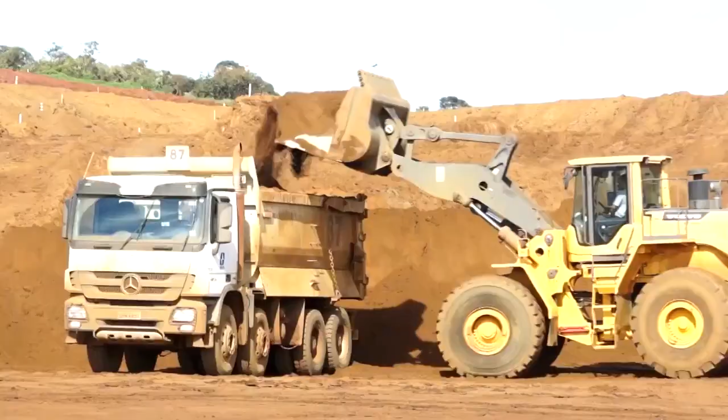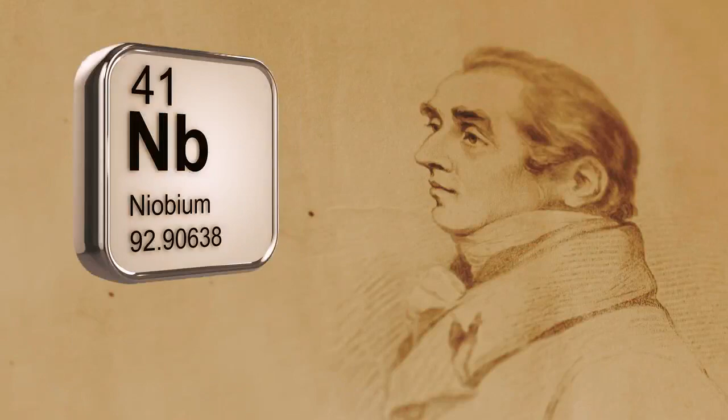The Charles Hatchett Medal, cast in niobium metal, is a prestigious award promoted by the Institute of Materials, Minerals and Mining, IOM3, and is sponsored by Brazilian mining company CBMM, Companhia Brasileira de Metalurgia e Mineração. Charles Hatchett was an eminent fellow of the Royal Society who discovered the element niobium over 200 years ago, and its unique properties have subsequently earned it a special place in the history of steel development, particularly in the last century. In fact, niobium was first added to stainless steels to improve weldability over 80 years ago.

The Charles Hatchett Medal is awarded annually to the authors of the best recently published paper on the science and technology of niobium and its alloys. The winning 2015 multi-authored paper describes an innovative approach to the metallurgical design of ferritic stainless steels, and we will learn more about this later. The research was carried out by a multidisciplinary team from Germany and the Czech Republic.

The winners of the award were presented with their medals during the IOM3's Premier Awards dinner on the 14th of July in Kensington, London. For me, that's really nice and impressive. Especially because now we're in line with a great row of former winners, and this really feels good. Yeah, I'm greatly honored to be one of the winners of this prestigious award, and I'm especially glad to have been part of the team who elaborated the work. And I think this award will provide us increased international visibility to boost our future research efforts on this topic.

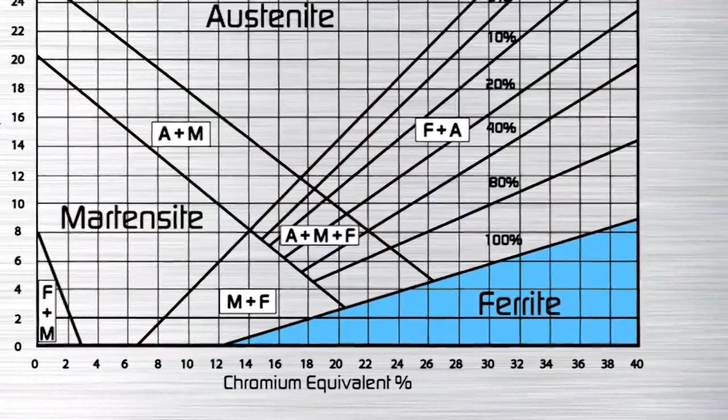Ferritic stainless steels, which contain either no nickel or much lower levels than austenitic stainless steels, are growing in popularity as a result of increasing nickel costs and have already gained a 30% share of the stainless market. The most common variants contain either 12% or 17% chromium, and specific sectors such as automotive are growing at 7% per annum.

The most common variant, which Marcos described as the ferritic workhorse, grade 430, is a 17% chromium alloy containing less than 0.75% nickel. We will see later how a niobium addition can provide ferritic stainless steels with enhanced combinations of strength and toughness, and Marcos also indicated how the use of niobium and molybdenum together could optimize high-temperature properties.

Ferritic stainless steels make sense, as they save substantially on key alloying elements, and thus make a significant contribution to the sustainable use of world resources. Bernd Kuhn of the Forschungszentrum Jülich GmbH Institute for Energy and Climate Research in Germany was then invited to present the 2015 Charles Hatchett award-winning paper on behalf of his co-authors.

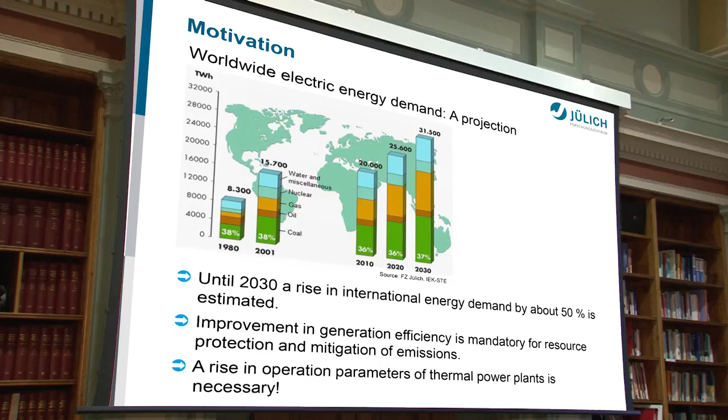By way of background, Bernd explained how world energy demand over the next 15 years is anticipated to rise by 50%, which would place additional efficiency demands on current and future power generation plant. Increasing efficiency can be obtained at higher operating temperatures, which require steels with higher chromium levels to give the necessary steam oxidation resistance. However, without taking additional measures, creep strength could be substantially reduced, negating any potential benefits of attempting to operate at higher temperatures.

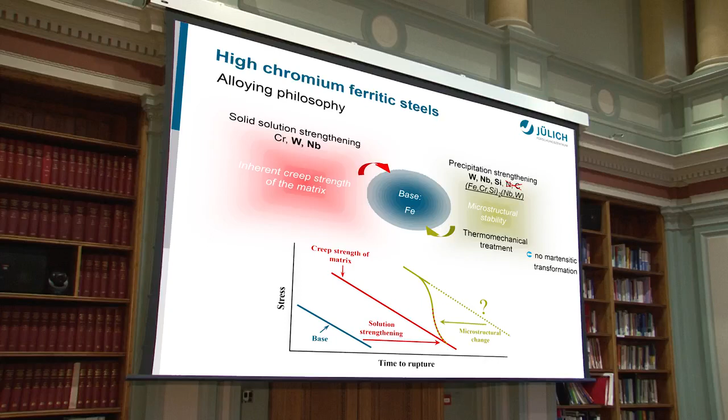Bernd's presentation continued to describe how, by optimizing the balance between tungsten and niobium in ferritic stainless steels with around 17 to 20% chromium, creep strength could be maintained or improved. Niobium enables this by increasing the volume fraction of Laves phase and by refining particle size and thermal stability.

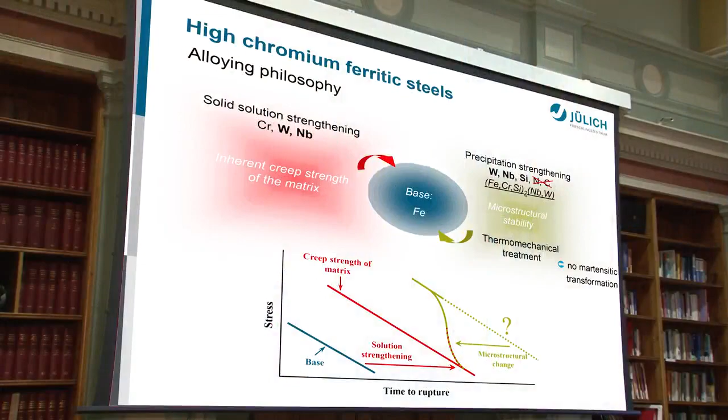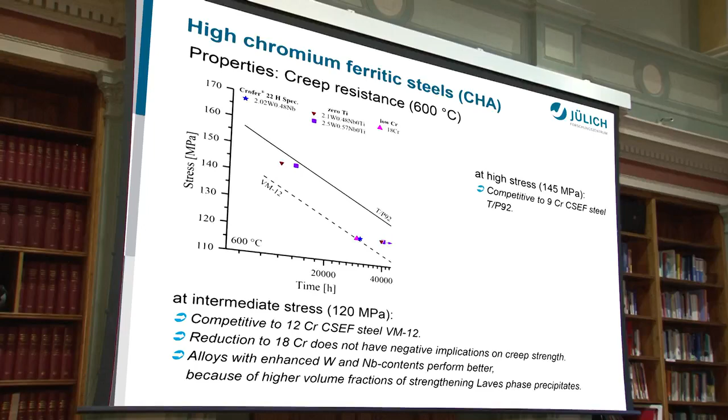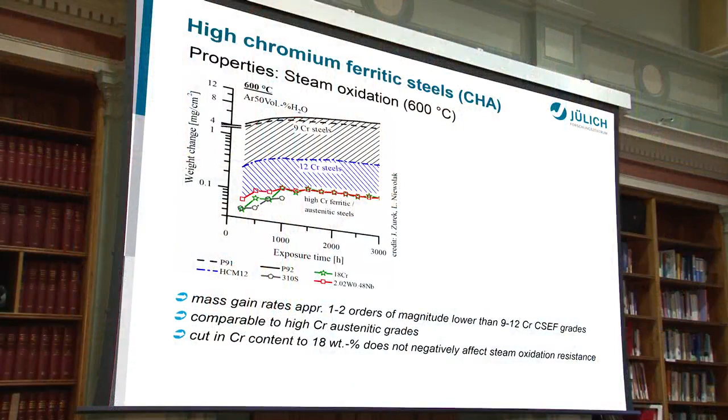By manipulating and optimizing thermal processing, alloy variations which exhibit adequate creep strength at up to 650 degrees centigrade can be achieved. This represents a remarkable breakthrough with this class of ferritic stainless steel. Finally, Bernd outlined an ongoing program for the development of compatible welding electrodes for the advanced variants of the new alloy designs.

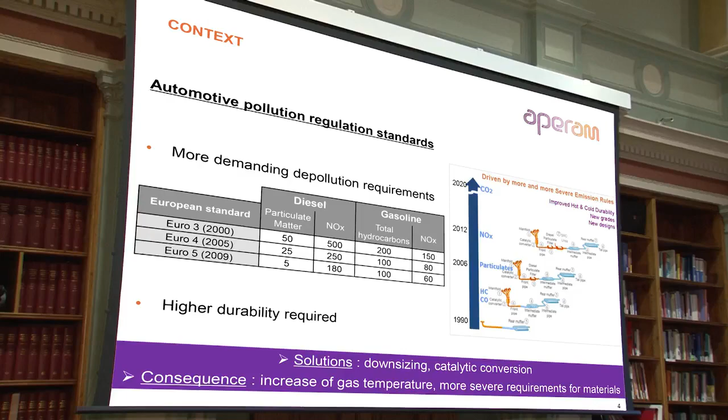Naylor then welcomed Laurent Fèvre of Aperam-Isbergues, France, to the podium to present a paper concerned with the development of a new ferritic stainless steel with improved thermomechanical fatigue resistance for exhaust parts. Laurent explained that increasing focus on pollution control and improvements demanded by new Euro standards were resulting in increased gas temperatures in automotive exhaust components, such as manifolds and turbochargers. Gas temperatures between 1000 and 1050 degrees centigrade are likely to be encountered.

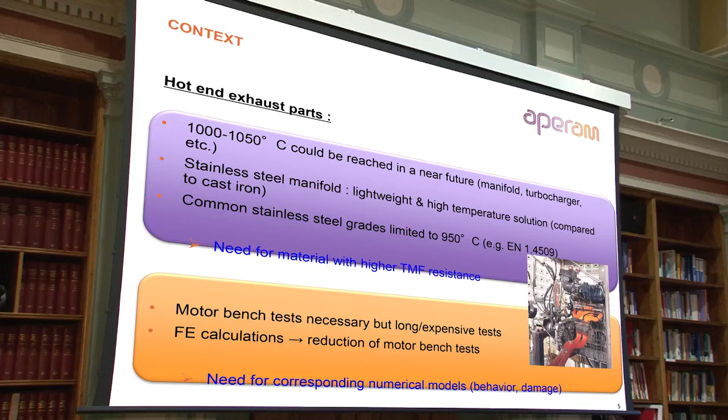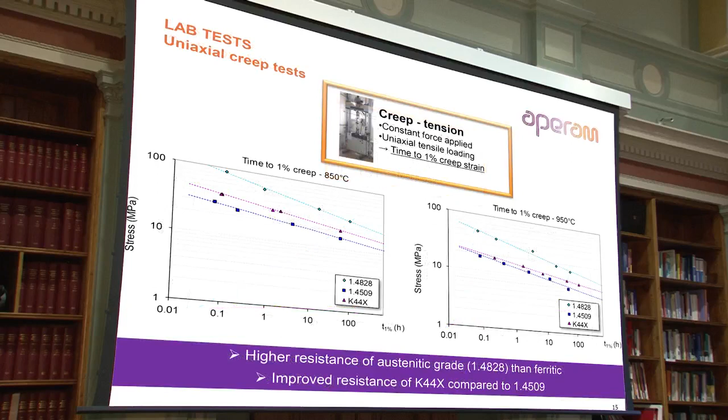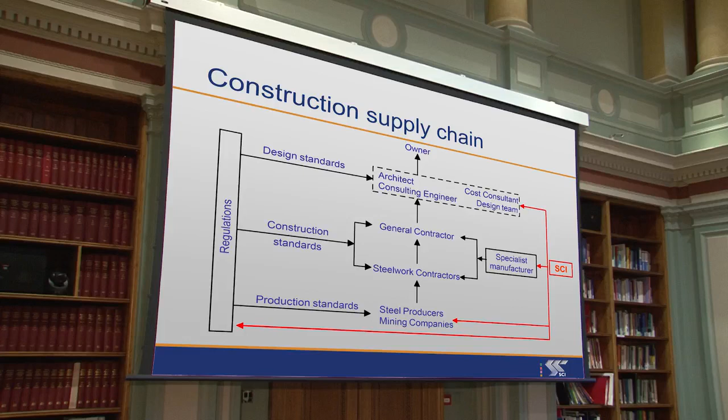Nancy Badu of the Steel Construction Institute, UK, was then invited to present her paper on ferritic stainless steels for construction applications. Introducing her presentation, Nancy explained the way in which the Steel Construction Institute interfaces with the supply chain in the UK. The SCI provides standards information, supporting guidance, fabrication and erection specifications, etc. She indicated that the Institute aims to influence designers and specifiers in favour of steel.

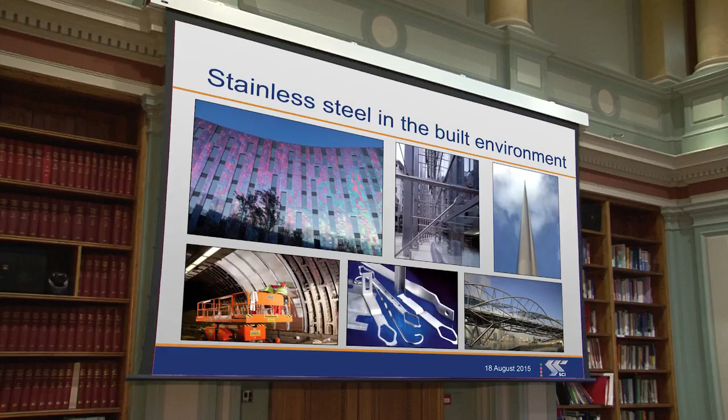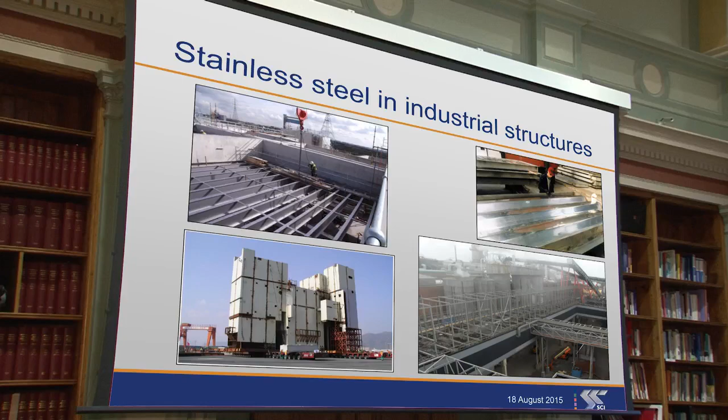Turning her attention to stainless steels, she used examples from the built environment and industrial sectors to illustrate potential benefits for stainless steels when lifetime cost considerations are taken into account. One example cited was of hand railings in a marine environment, where the long-term benefits of stainless provided clear and ongoing maintenance cost benefits after just 15 years of service.

Nancy continued to explore areas where ferritic stainless steels could be used to advantage in place of much more expensive austenitics, and used examples from Australia to validate her ideas. She also explained that in some circumstances, ferritic stainless steel could be a long-term economic competitor for galvanized mild steel.

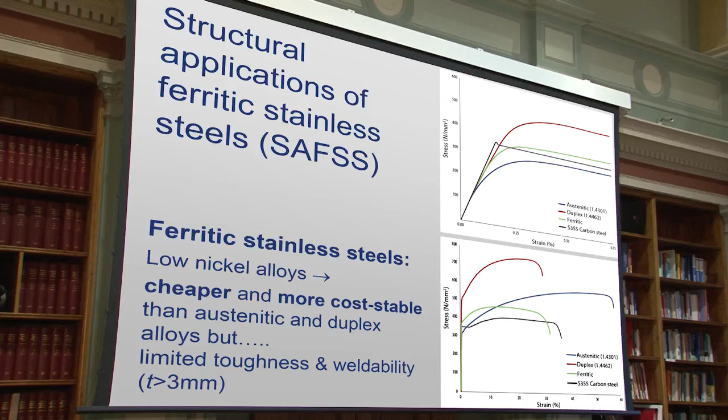Finally, with reference to the stress-strain tensile behavior of ferritic stainless products, she indicated how their higher strength and lower continuous yielding could be used to maximum benefit, including for fire resistance up to at least 600 degrees centigrade.

Nyla then introduced Yang Weihao of the Shanghai Mitsubishi Elevator Company in China. Yang presented an interesting paper on the use of high surface quality niobium-bearing ferritic stainless steels for elevators. Yang introduced his subject in dramatic style, with a view of the 632-metre-high Shanghai Tower, which boasts the fastest elevators in the world. They travel at an amazing 18 metres per second.

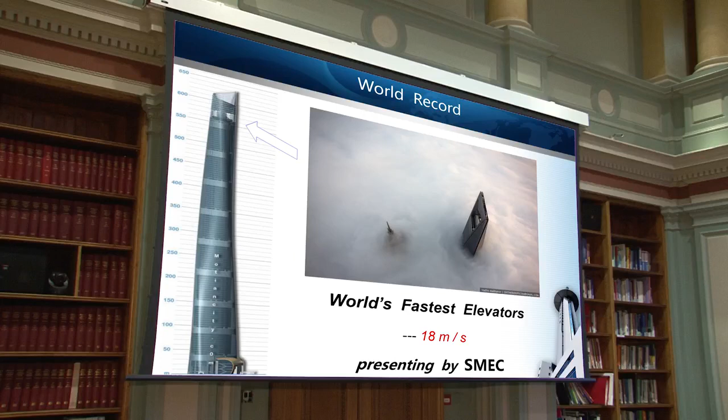The market in China for stainless steel is growing at a remarkable rate, and Yang's company has been number one in the elevator supply chain for 22 consecutive years. Yang described the aesthetic and practical advantages of stainless steel for many different elevator components, and also explained how its ease of formability contributed to its growing popularity.

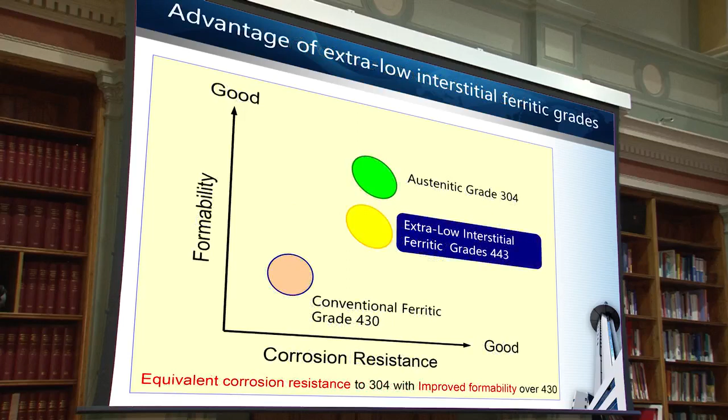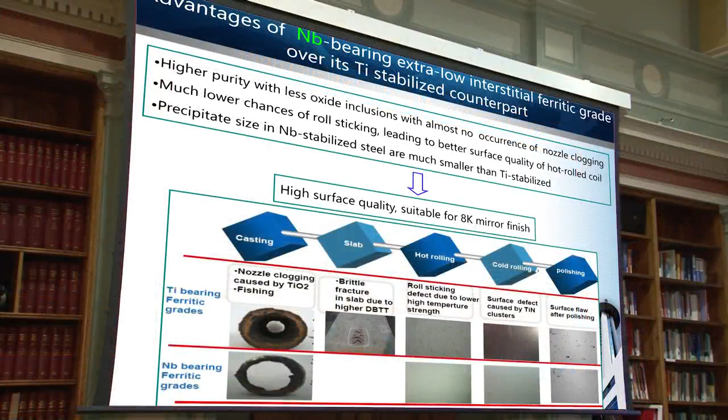However, using additional niobium at the 0.3% level in combination with copper up to 0.4%, a new, finer-grained steel has been developed with significantly enhanced tensile properties. The enhanced steel, grade B443NB, has already been successfully utilized in many different types of lifts and is saving up to $4.2 million per annum through weight saving and other advantages. Research is ongoing to maximize the benefits which can be derived from this latest addition to the ferritic stainless steels family.

The final speaker at the seminar was Andrew Backhouse of Outokumpu Stainless, UK, who presented a paper outlining future developments in stainless steels containing niobium. Andrew opened his presentation by reminding the audience that his company's base in Sheffield was the birthplace of stainless steel through Harry Brearley in 1913. He then went on to describe Outokumpu's world market penetration in the stainless market, indicating that 19% of their market was already accounted for by ferritic variants.

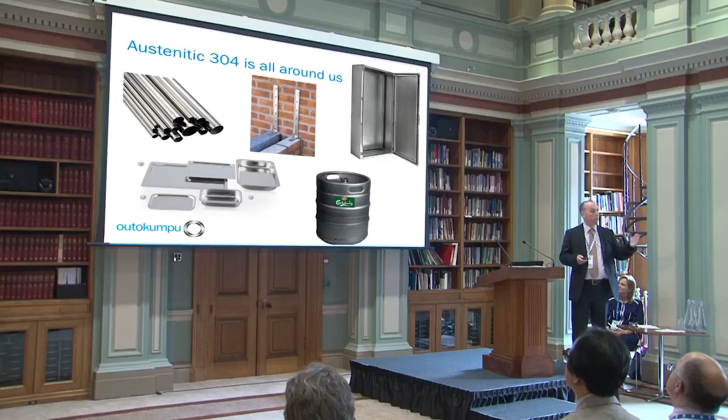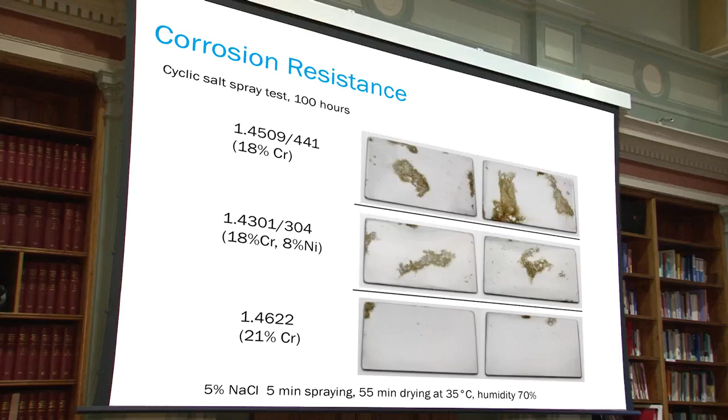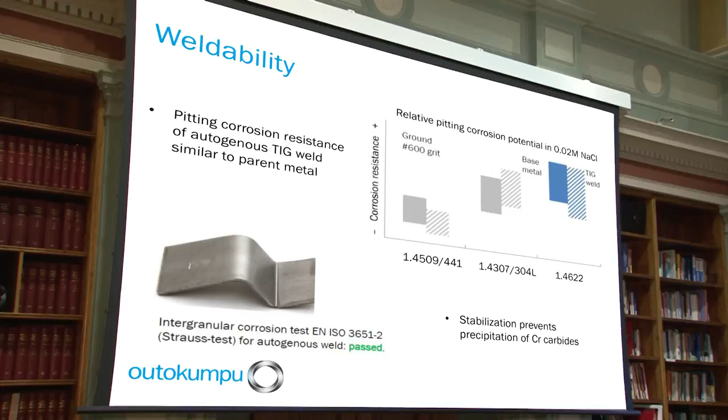Austenitic grade 304 is all around us in everyday applications, but the ferritic 430 grade is an increasingly important competitor in the UK market. Now, with further development, new improved grades of ferritic stainless steel are available, and these have better corrosion resistance and enhanced weldability. Alloying with chromium up to 21% and using titanium and niobium additions of up to 0.7% has enabled the development of a cost-effective and much improved ferritic stainless steel. This is more formable and weldable, with corrosion resistance equivalent to that of austenitic materials, but with the enormous benefit of using no nickel.

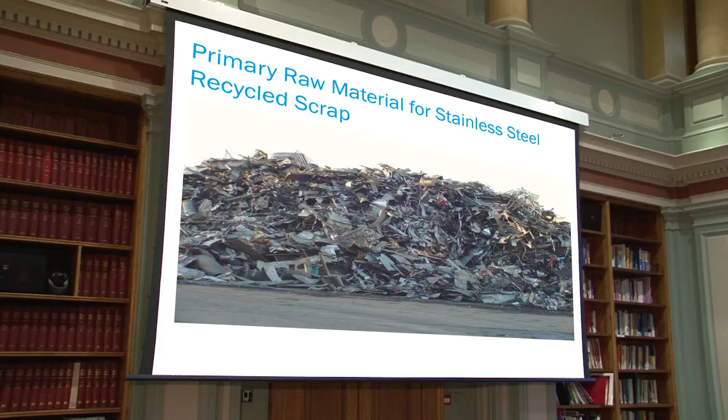Thus, ferritic stainless steels are poised to continue to penetrate the austenitics market at an increasing rate, whilst making a major contribution to the sustainable use of the Earth's scarce resources. Stainless steels are also 100% recyclable, which, as Andrew points out, is a further important factor in the current climate. At the end of a very informative seminar and an excellent open exchange of technical views and opinions, Eduardo Ribeiro, Chief Operations Officer of CBMM, once again thanked all the speakers and invited guests for their participation.

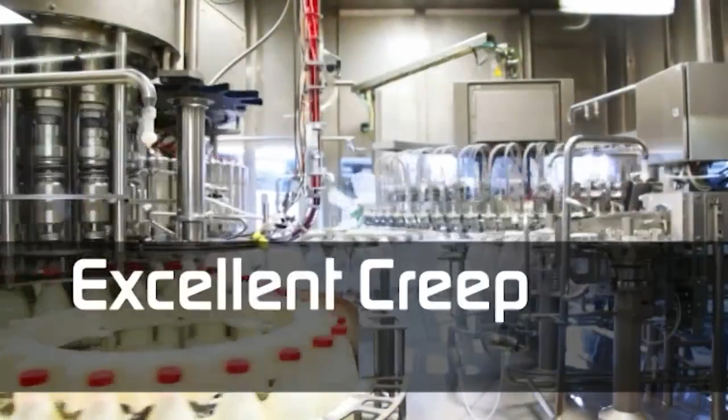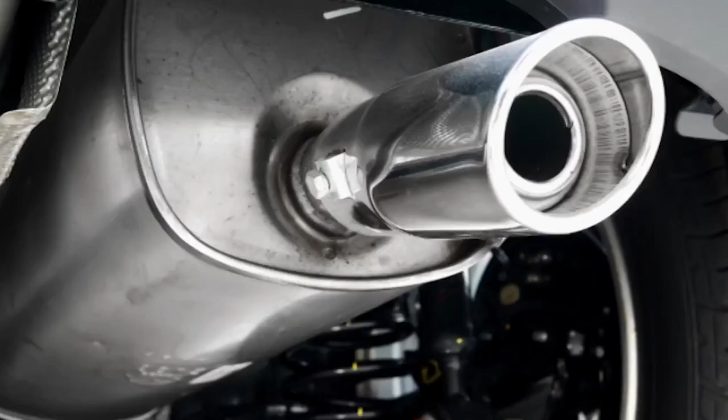The global stainless steel growth story is remarkable and shows no signs of slowing down, particularly in Asia. With their attractive combinations of properties for an ever-increasing range of applications, ferritic stainless steels, especially those microalloyed with niobium, are well placed to continue their relentless penetration of the austenitics market, and in doing so will make a meaningful saving to the world's consumption of nickel and to the sustainable use of our finite resources. There is a bright future for niobium in stainless steel.